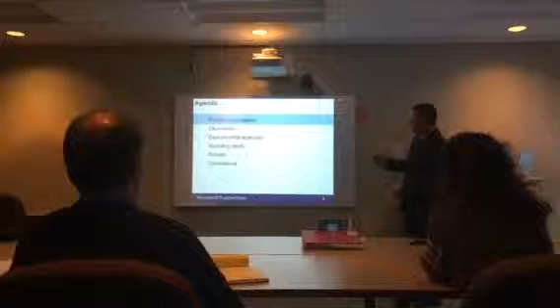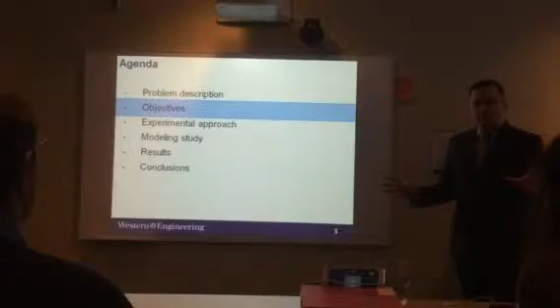The agenda I'm going to be following today is represented in this slide. I want to start with the problem description, then explain the motivation and why I did this research, then go through the objectives. I divided the presentation into two parts, experiments and modeling, and finally I want to show the results and conclusions. So let's start.

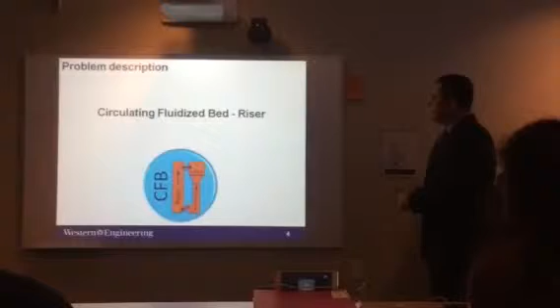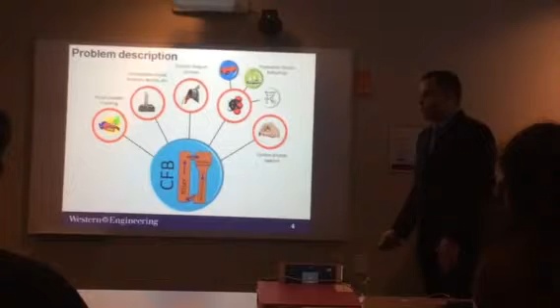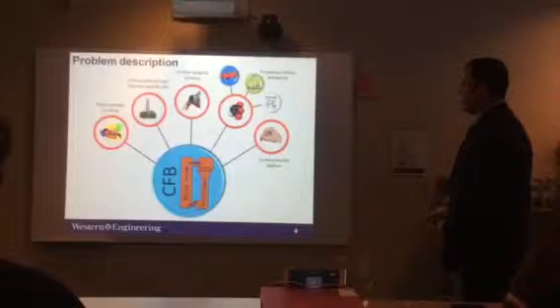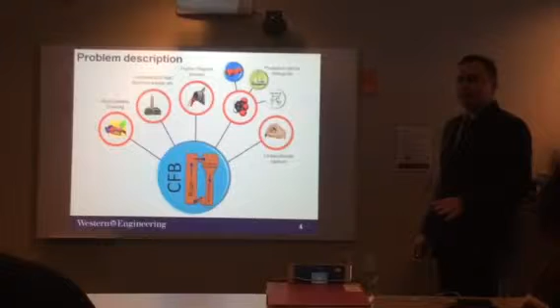Circulating fluidized beds using risers have been implemented in large amounts of processes nowadays in industry. The main feature is that the fluid goes through the riser one time, while the particles circulate in a closed loop many times. Examples of circulating fluidized bed applications include the production of gasoline in fluid catalytic cracking, the combustion of coal, biomass and waste in power plants for power generation, the Fischer-Tropsch process for synthetic oil and synthetic fuel production, and the production of maleic anhydride, an organic compound used to give superior properties to polymers used in the automobile industry, recreational boat production, and bathroom fixtures. We can also find circulating fluidized beds in carbon dioxide capture to mitigate emissions to the atmosphere. So as you can see, circulating fluidized beds are very important nowadays.

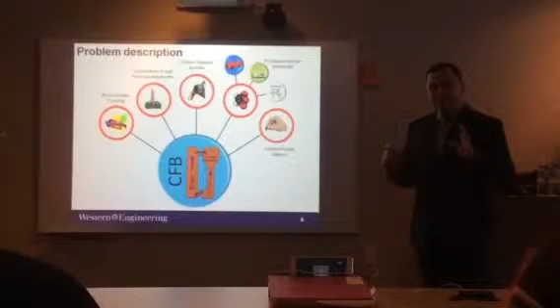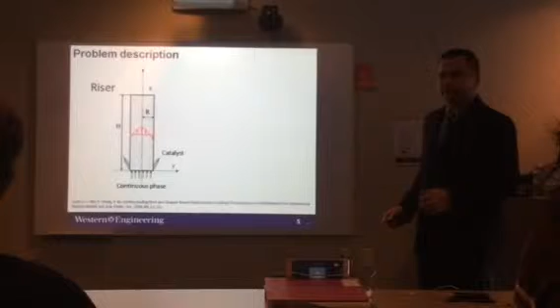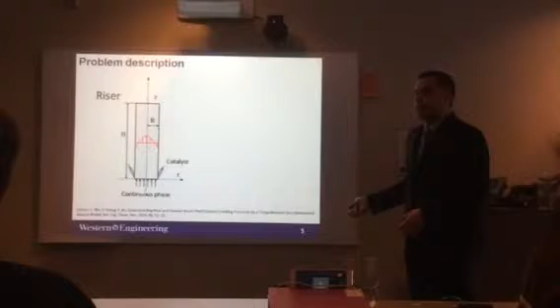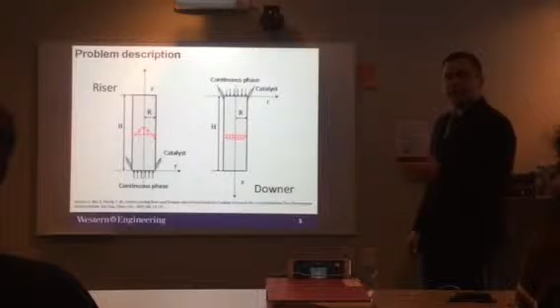When we look into the riser of the circulating fluidized bed, we notice that everything goes up against gravity. That's why risers present a major problem: a back-mixing effect in the riser. So I dedicated my study to a solution that can be used in circulating fluidized beds, and that solution is the application of a downer. In the downer, everything goes down in the same direction as gravity, and that's why the profile is flatter, which is very convenient for some processes.

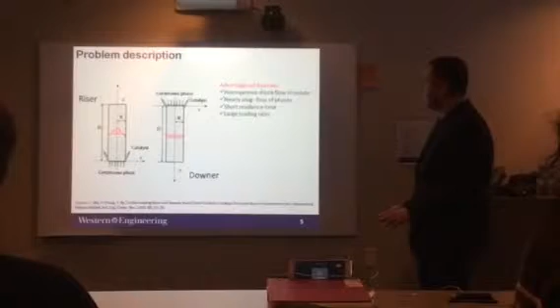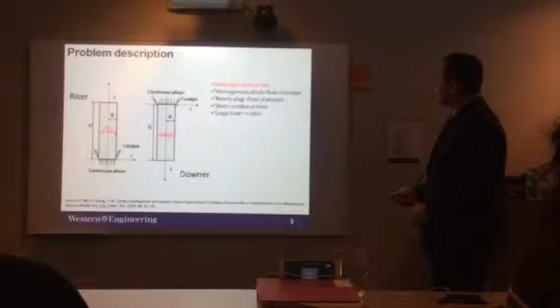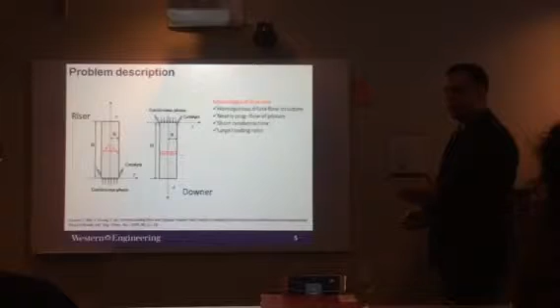In the downer, the main advantages are a homogeneous, dilute flow structure with better selectivity, a nearly plug flow of phases with narrow residence time distribution of particles inside the reactor, short residence time because the back-mixing effect is not there, and we can load the reactor with a large ratio between catalyst and fluid.

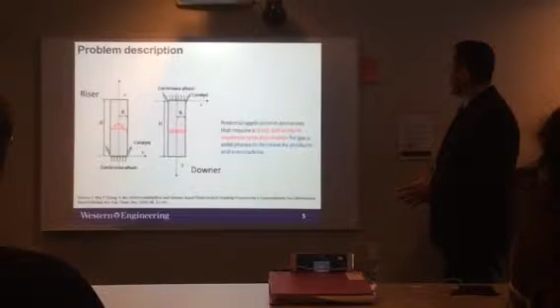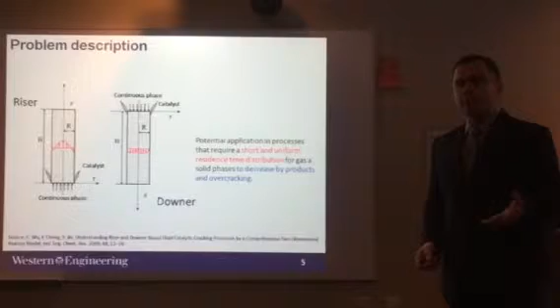Having said that, the downer has potential applications in processes that require short and uniform residence time distributions. An example of such a process is gasoline production, which is an intermediate product where selectivity is important and reactions are very fast.

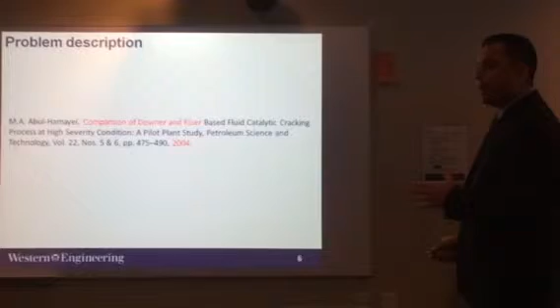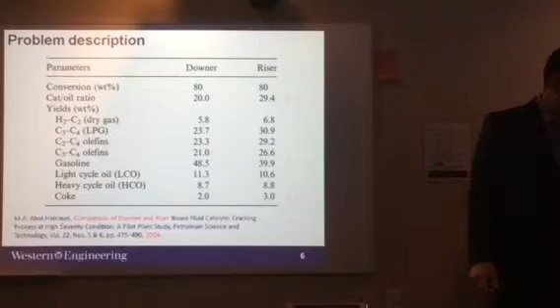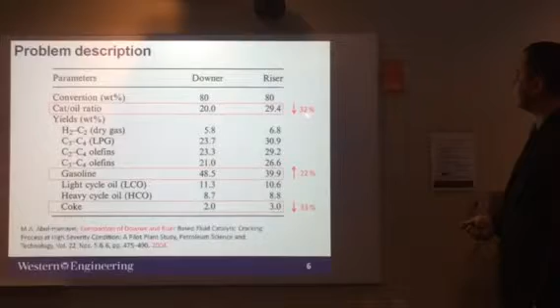In 2004, Abul-Hamayel did a pilot plant study comparing downer and riser for FCC application. He found that, compared under similar operating conditions, the downer produced 22% more gasoline, with a lower amount of coke and 32% less catalyst needed in the unit. These results are very promising for the application of downers in industrial processes.

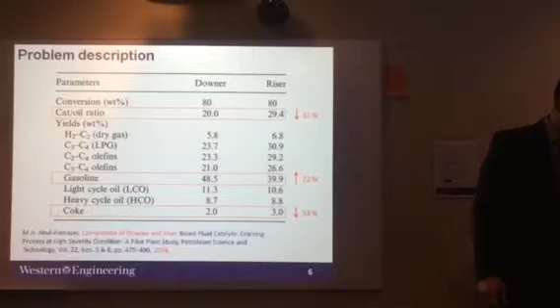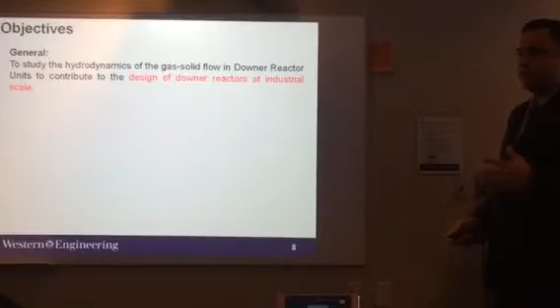Now let's talk about the objectives of my research. The general objective is to study the hydrodynamics of gas-solid flows in the downer to contribute to the design of downer reactors at industrial scale. The specific objectives are the following: individual...